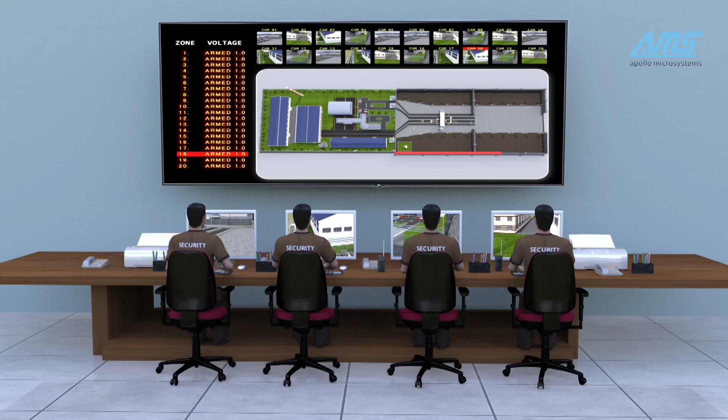Apollo Microsystems is a renowned defense systems supplier. With its design lab headquartered in Hyderabad, India, AMS is one of the first few companies to offer electronic systems for mission-critical and safety-critical applications. The state-of-the-art facility offers design, assembly, and testing as end-to-end solutions.

He's a wonderful person, a strong visionary, and a mentor. He gives us clear direction on every aspect of strategy and operation, which gives a lot of comfort to work with. We share his dream to grow this company strongly in every vertical that we work for.

I come from a middle class family. My father was a teacher and also was into farming. I chose to be an entrepreneur and started this company with a very small investment in the year 1985. When I started this journey, the size of the industry was very small. We were one among the first private companies providing services to the defense and space sector.

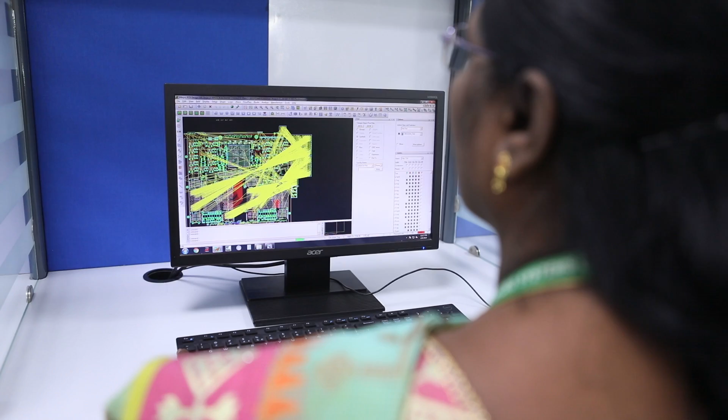Engineering design has always been my strength, and we started offering board design services to DRDO and the Department of Space. From a design services company, we transitioned into board design development, subsystem development, and system level development. I take pride to share that we have designed more than 400 technologies for defense and space sectors in this long journey of 34 years.

We have been working on an underwater weapon electronic system for the past 28 years, and now the same weapon is the first weapon being exported from India.

Keeping in view of the growing defense system requirements, we have built a complete ecosystem right from concept to manufacturing. With the last 34 years of multidisciplinary, multi-domain expertise that we had built, we now enter into the aviation market through our Canard aircraft offering.

It has been an incredible journey, and I thank all our customers, bankers, investors, suppliers, and all my colleagues for being a part of this successful journey and having bestowed faith on me and on the company.

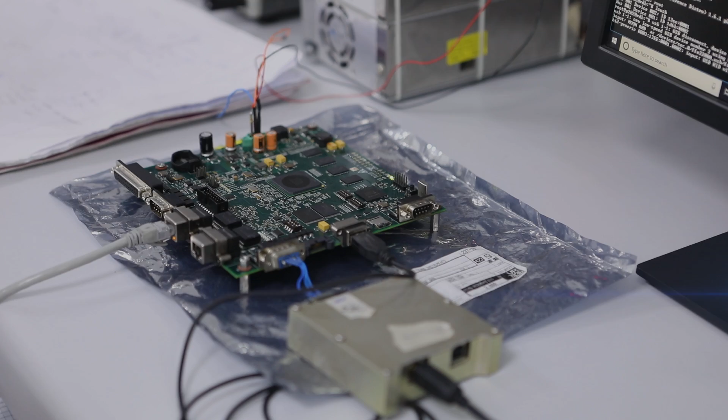We are working in a very niche market of aerospace and defense, which requires a lot of patience and perseverance. The gestation cycles of development and qualification of each system in each vertical we work for are very long, so patience and perseverance has always been part of the DNA. We are trained for it, and we always walk through with our customers and ensure that the systems are developed on time with state-of-the-art technology.

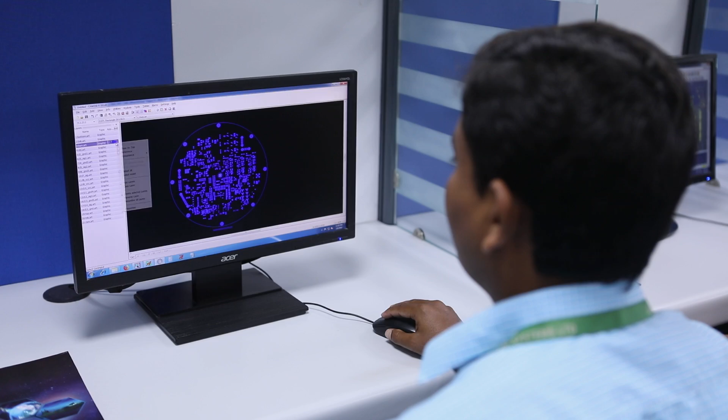AMS has a strong R&D team of 150 plus engineers with core competencies in development of embedded hardware, software, and engineering designs, including packaging of electronic hardware for various verticals. The team is well versed in the design of multi-million gate, high-speed, high-density, multi-layer, digital, analog, RF, mixed signal PCBs. They are proficient in multiple disciplines with emphasis on signal integrity and high voltage designs.

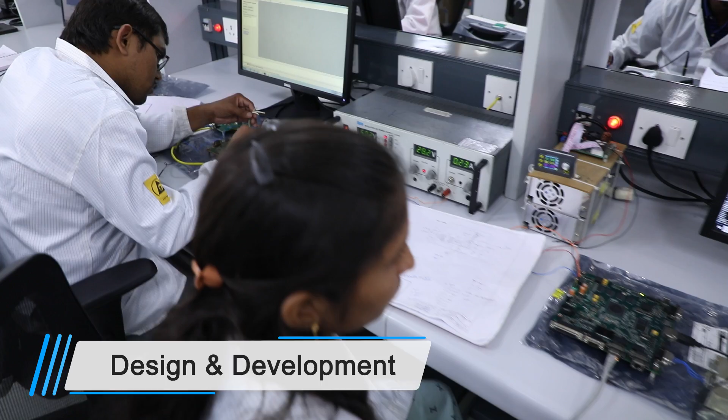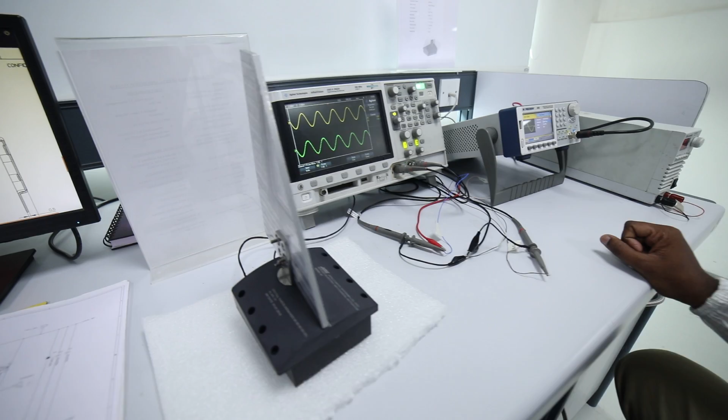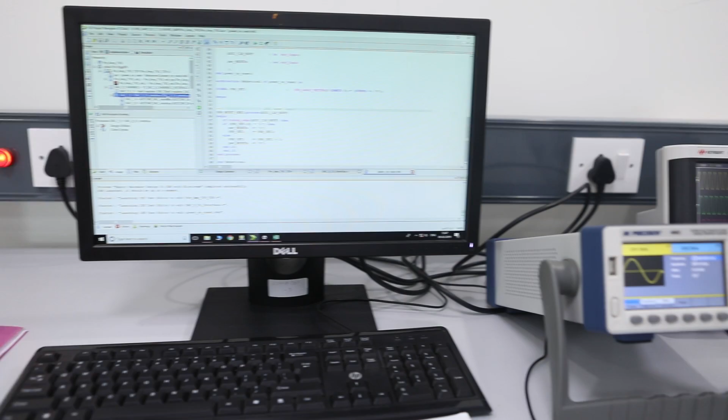The defense systems should meet harsh and extreme environmental conditions. The enclosures should be designed to meet different conditions like forced cooling and conduction cooling. AMS has an in-house engineering design team consisting of system architects and PCB design engineers. At AMS, we design and develop high-performance, custom-built ruggedized electronics and electromechanical systems to withstand extreme environmental conditions in space, naval systems, avionics, missile defense, ground defense, and homeland security.

AMS in-house stores has all the necessary materials stocked that are needed for design and assembly. The stores are maintained with all safety standards. Every material component on receipt is binned in stores only after inward inspection, and data is maintained using ERP. The entire documentation is well maintained for traceability as per AS 9100 standards.

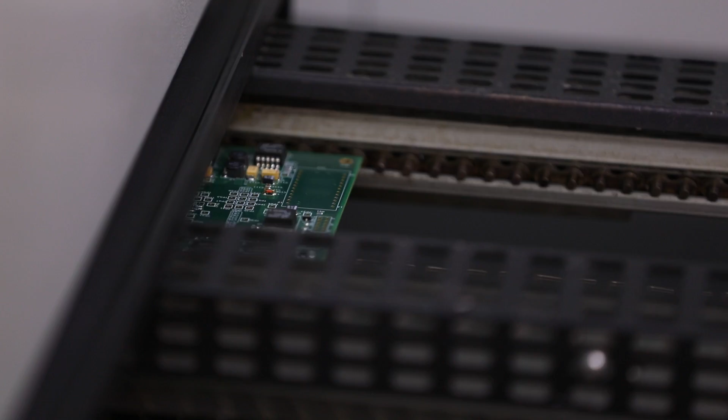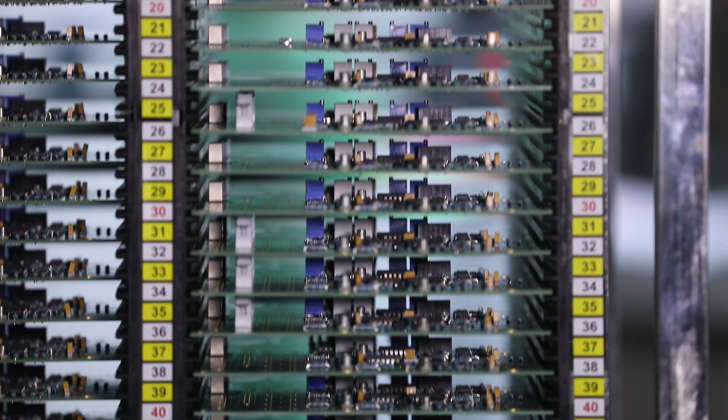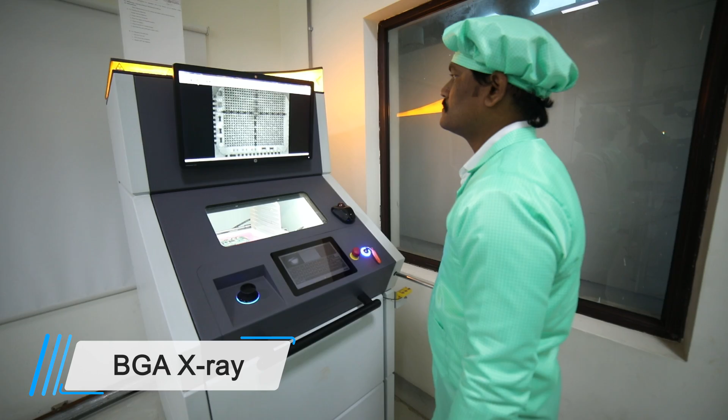Engineers at the SMT line configure printed circuit boards with automated processes. Automatic optical inspection ensures the highest quality of the PCBs. Inspection of populated PCBs is carried out by IPC certified engineers using 150x magnifiers, AOI and BGA X-ray. If there is scope to improve the quality further, they are sent for rework.

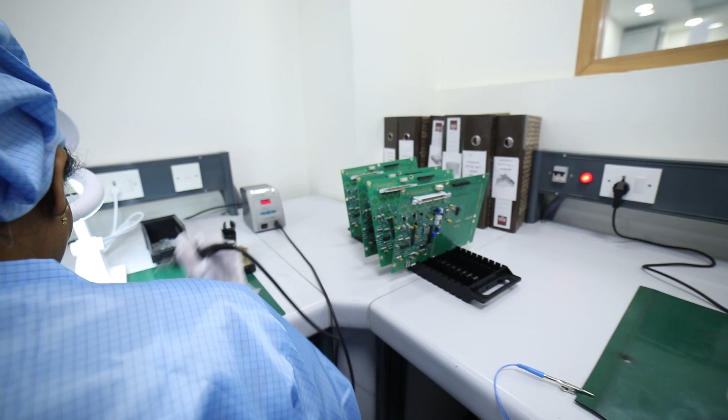A wash cycle is required to clean the PCBs to remove debris, followed by conformal coating.

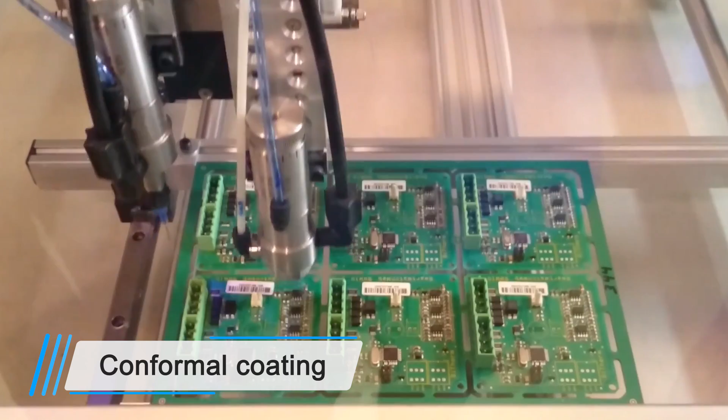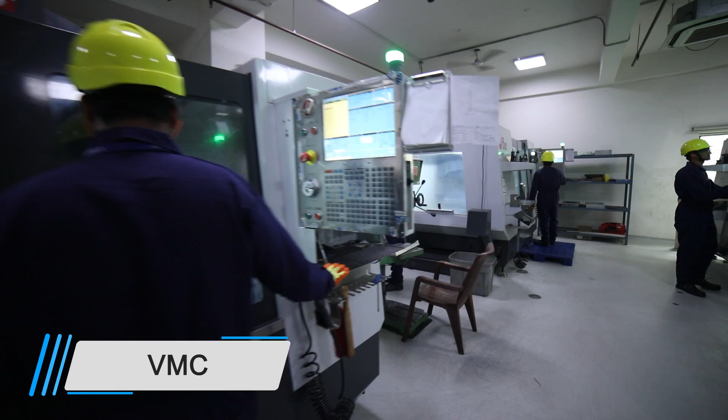Our machine shop is equipped with CNC vertical milling machines and can handle jobs up to 6 microns accuracy. Our wire electrical discharge machining can handle jobs up to 2 microns accuracy with sharp edge finish and excellent surface finish.

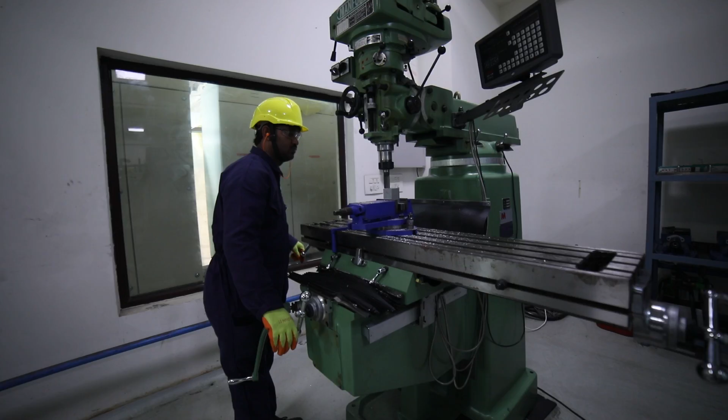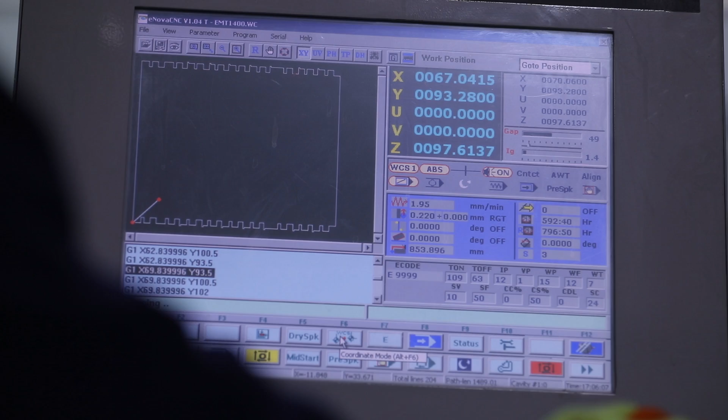We have an in-house tool room facility. The machine shop is the beating heart of our mechanical division.

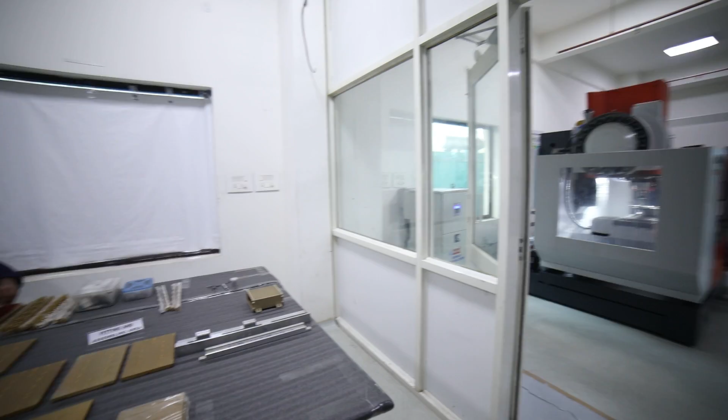Unit assembly and harnessing is done by IPC trained technicians to meet IPC standards. Our team has exposure in harnessing for ground equipment, missile systems, shipborne systems and many more.

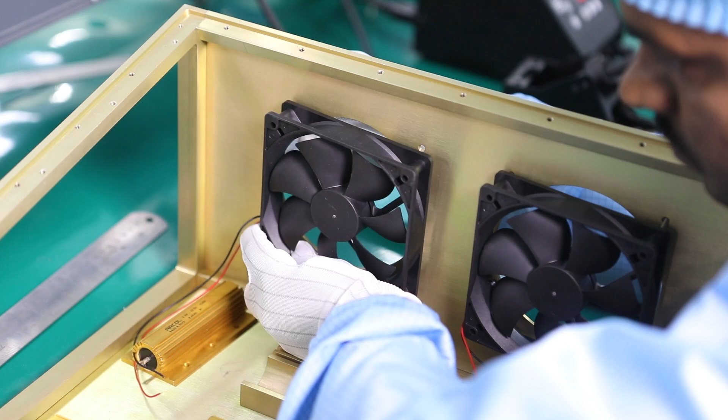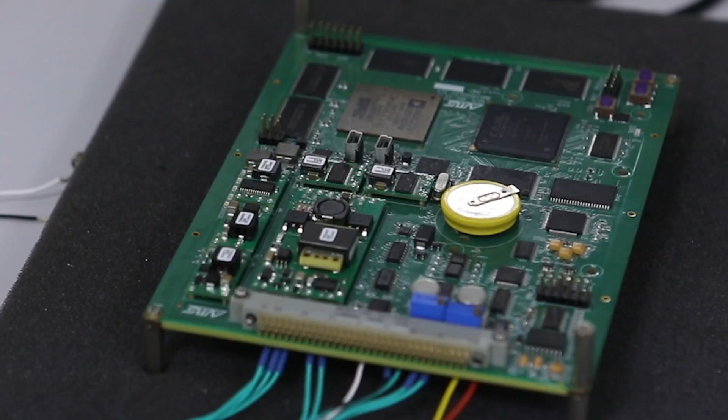In-circuit testing looks at the functioning of individual components after they are soldered in place. Functional testing provides a final go or no-go decision on finished PCBs.

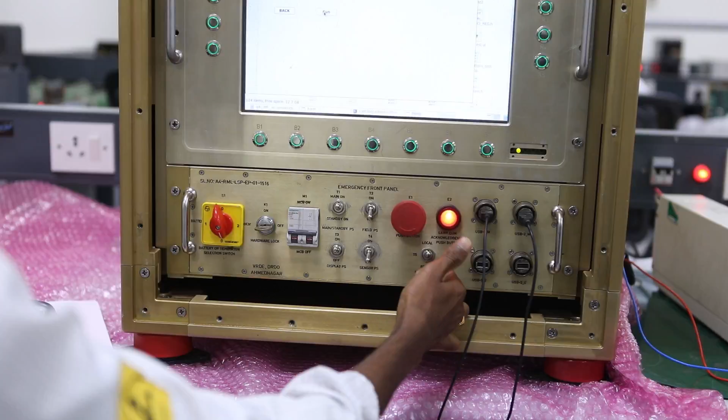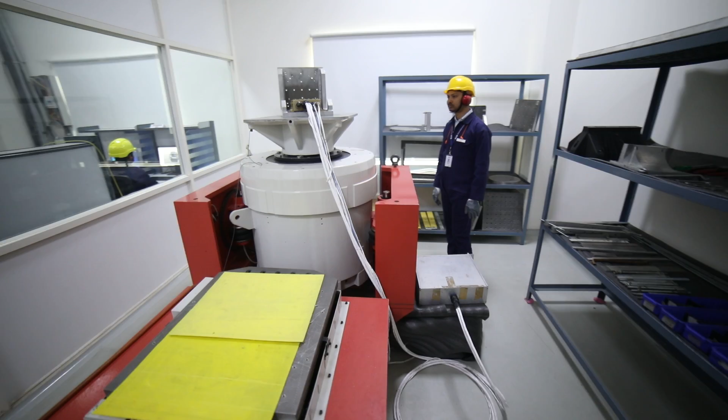Our ESS facility is equipped with vibration shaker and temperature cycling chambers. Vibration facility team designs its own jigs and fixtures to carry out vibration of equipment which are of varied sizes.

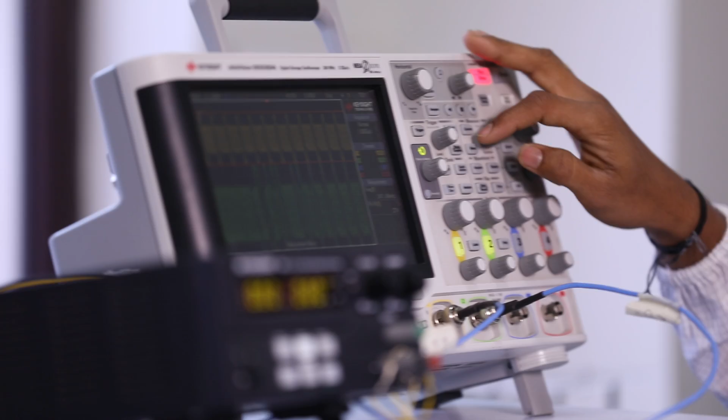A detailed review is carried out on each project at periodic intervals involving all stakeholders like system architects, team leaders, quality control and production teams. Gap analysis is done in presence of the management team.

Apollo Microsystems has a solid marketing and sales function.

AMS is an employee-friendly company. AMS has 33% of workforce as women.

AMS practices a transparent culture that creates openness between management and employees. AMS helps its employees achieve and maintain healthy work and life balance by organizing various training sessions related to work and personal development.

AMS believes that companies are built on people and not just products.

Finance function at AMS is led by financial experts. AMS posted consistent revenues and profits in the last year.

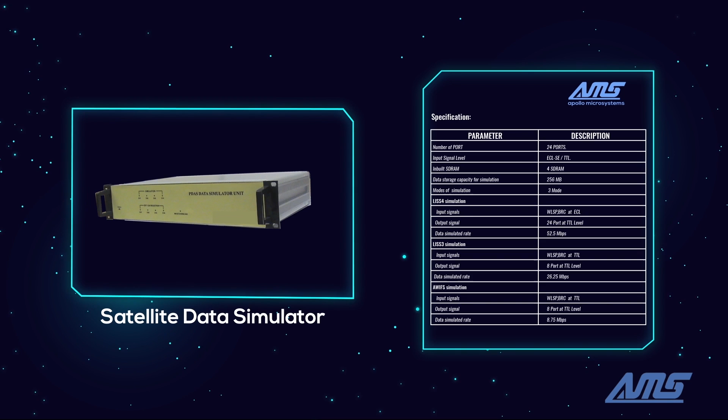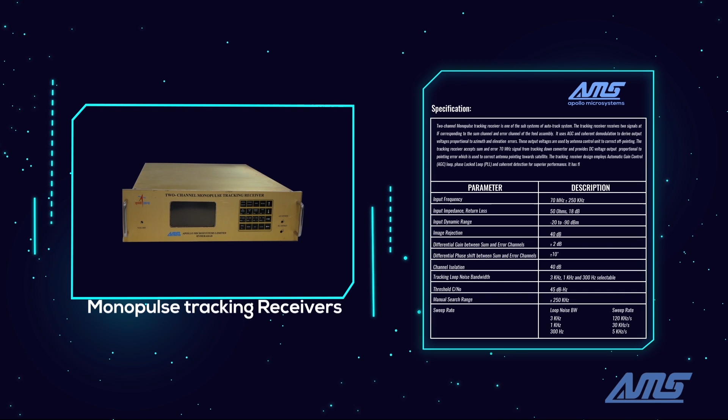Products and their applications: integrated payload checkout system, satellite data simulator, high-speed frame synchronizer, time code reader generator, bit synchronizer, monopulse tracking receivers, high-speed data recorder and data handling system.

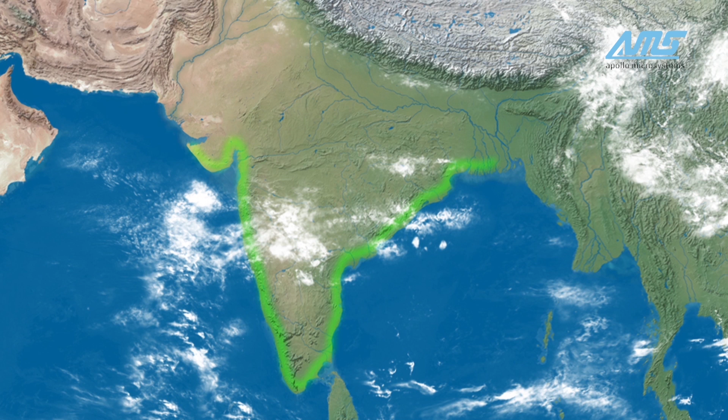India has a long coastal line of 7,517 kilometers, which is vulnerable to threats from enemy countries, pirates and natural calamities. Indian Navy plays a vital role in defending all the threats and keeping the nation safe around the clock.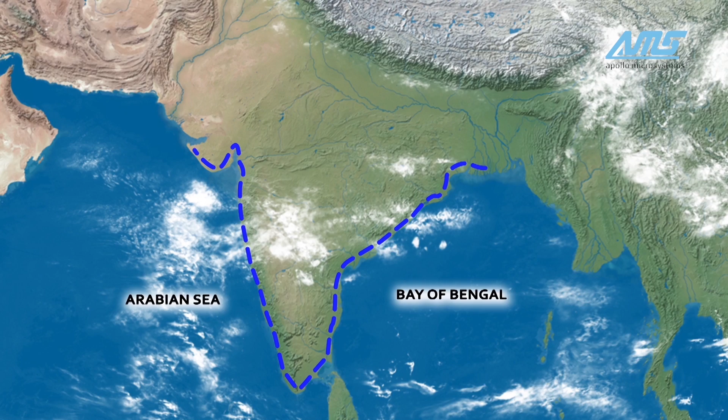The naval infrastructure is equipped with fighter frigates, smaller ships, remote unmanned operating vehicles, submarines which carry underwater weapons, and electronic warfare systems. TAL, Advanced Light Torpedo.

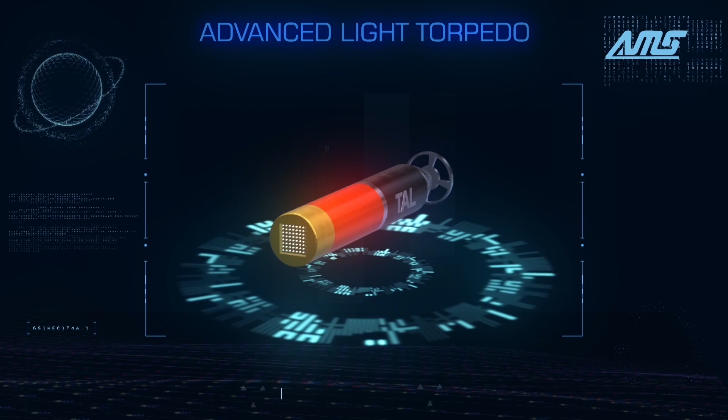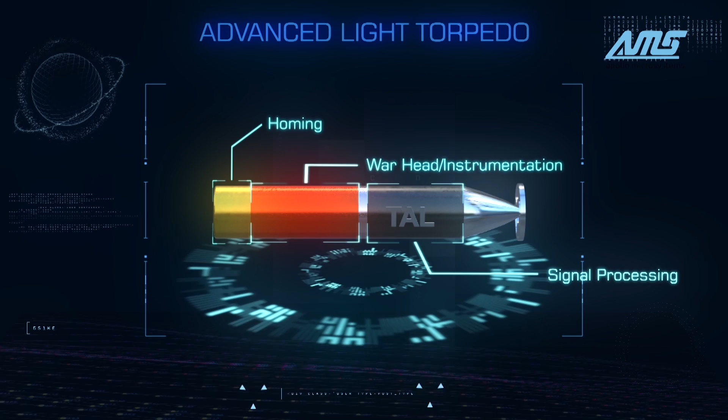AMS is working in TAL torpedo weapon electronics for the past 28 years and has contributed in its life cycle development, management and support. This is the first weapon being exported by India, and AMS has key contribution in this weapon system electronics.

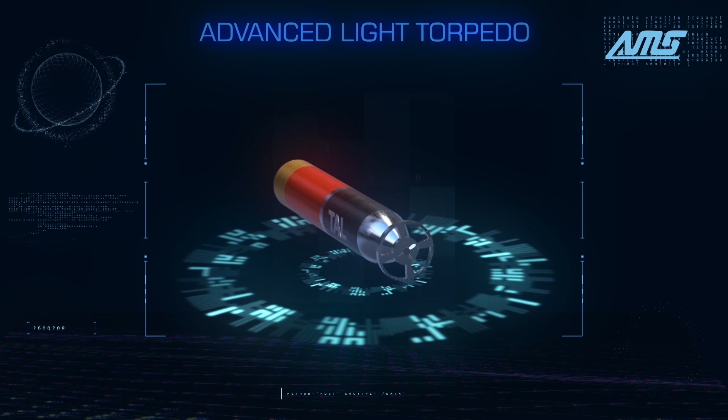We are the only private industry who has developed homing systems for torpedoes in India. The entire weapon electronics in TAL are supplied by our company, making us a unique supplier.

SSBN - First Indigenous Nuclear Submarine Program. AMS proudly presents its contribution in India's first indigenous nuclear submarine program. The power supply chain and monitoring systems are fully qualified and have demonstrated their reliability for past several years.

This is a testimony of our diversified technical capabilities. Ship: AMS supplied sonar systems, turret control systems and marine consoles for ship-borne applications.

Enemy submarine detection - Varunastra. AMS has been part of several torpedo programs, and in the Varunastra program, our signal processing systems are qualified and added immense value for the weapon.

Marich is an expendable decoy and is the first indigenously developed decoy in India. AMS has a key contribution in the programs under the guidance of DRDO.

The state-of-the-art algorithms and signal processing hardware are developed by AMS. The decoy has undergone successful trials and is accepted for induction by Indian Navy. Upon detection of enemy torpedo, the command control team programs the firing of the decoy to deceive the enemy torpedo.

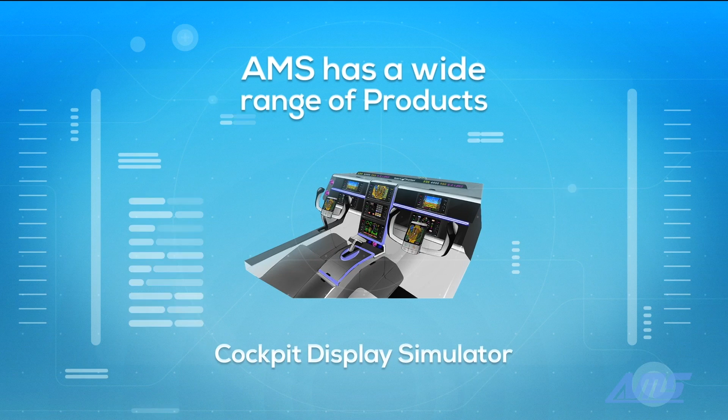AMS has a wide range of products: gimbal payload electronics, generic PCM encoder and decoder, DC UPS unit, quad actuator controller, radio altimeter, cockpit display simulator, advanced fire control system, fin actuation control systems. Our expertise in defense avionics is poised to take off into the aviation market.

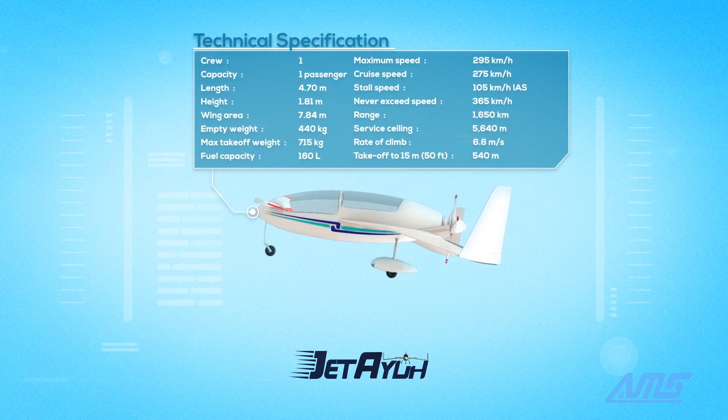Any nation's integrity is protected by armed forces. Especially military plays a vital role in combat situations to protect the country against land-based attacks. They are fighting for tomorrow by giving up their today.

AMS has built specialized expertise in development and manufacturing of rugged electronics used for military applications. Ground-based military electronics requires meeting harsh environmental conditions. Our systems comply with MIL STD 810F requirements.

Our engineering expertise, coupled with our strong hardware design knowledge, makes us a unique solution provider delivering a reliable product, covering vibration, shock, humidity, high temperature, low temperature, and EMI/EMC.

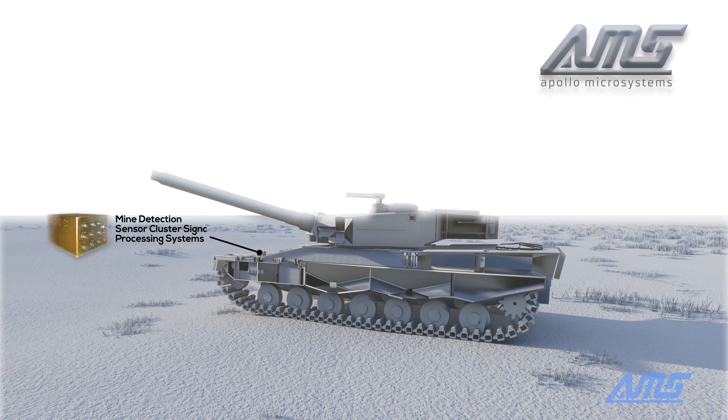AMS products include: mine detection sensor cluster signal processing systems, transmission control, throttle control, intelligent vehicle data monitoring, stabilized turret control systems, instrumentation cluster, navigation systems, tactical data link modem and antenna navigation systems, electric and hydraulic servo drive system, mil-grade DC power supplies, electronic suspension system, motion control system, climate control system.

Missile defense systems are meant to protect nations from incoming missiles and act as a missile shield for the country, specifically for strategic locations.

AMS has been working on Indian missile programs for more than 3 decades and brings in technical and domain expertise, and has been a key contributor to the success of many of the programs. We stand among the first few private companies contributing to indigenous missile programs, and systems developed have been successful in trials and have entered production phase.

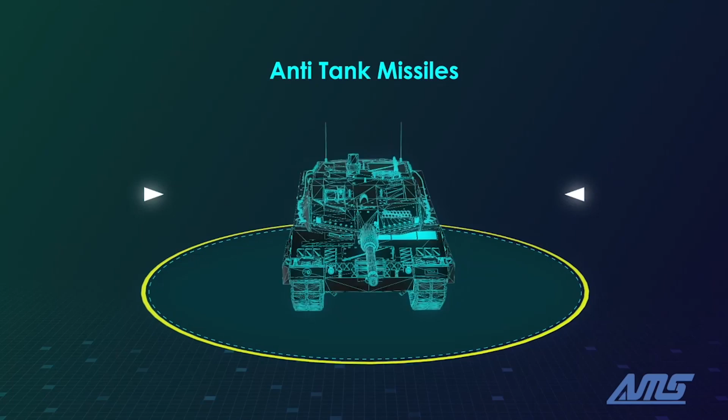We offer on-board weapon electronics and ground support equipment for missile defense systems. Technologies developed by our company are part of the success story of surface-to-surface, surface-to-air, intercontinental ballistic missiles, anti-tank missiles, air-to-surface, submarine launch missiles, and air defense missiles with capabilities of reaching the exosphere.

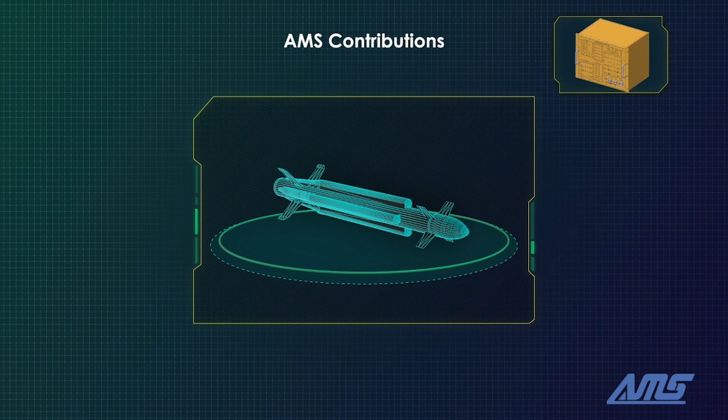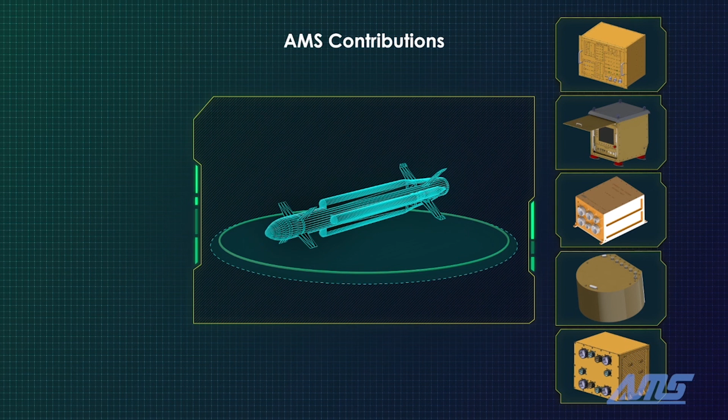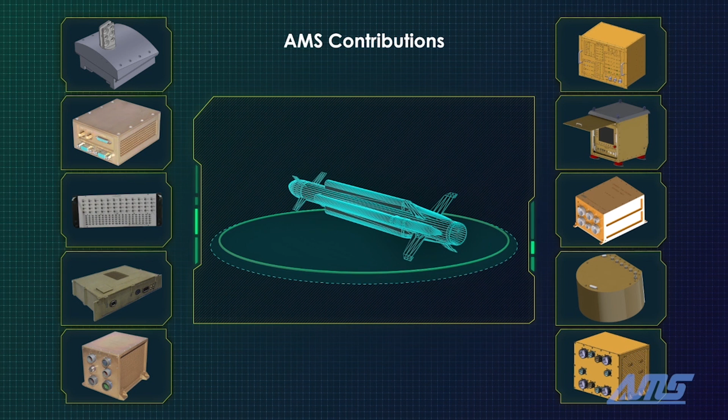AMS contributions include: missile hardware simulators, launcher controllers, PCM encoders, digital signal processing systems, FPGA-based quad-channel controller, electromechanical actuators, signal processing units, launch interface units (LIU), INS inertial navigation systems, IAM integrated avionics modules, MIU missile interface units, PSSU power supply switching units, and checkout systems.

Systems developed and manufactured by us undergo stringent quality processes laid down specific to the application and comply with MIL STD 461F and MIL STD 810D.

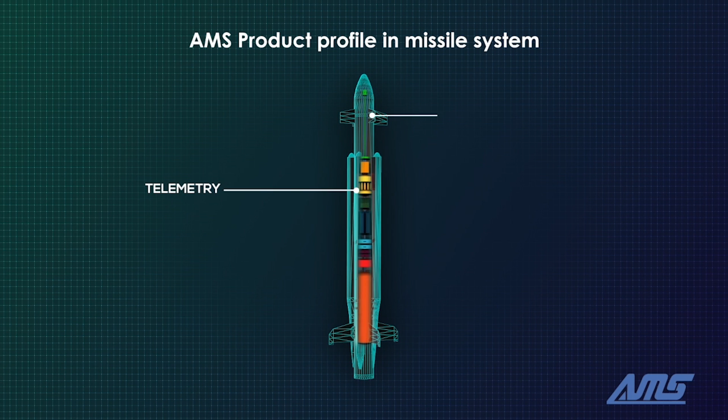AMS Products Profile in Missile System: Telemetry, RF Receiver Antenna, Radio Proximity Fuse, Target Update Receiver, Servo Control Unit, Command Guidance Unit, Sensor Package Unit, Onboard Computer, and Missile Interface Unit.

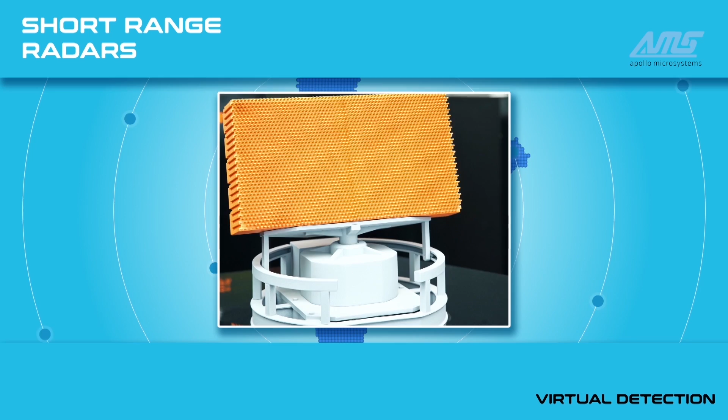Short-range radars detect obstacles and possible impacts. AMS has solutions for secured vehicle, pedestrian and sliding gates with integrated gate arrays.

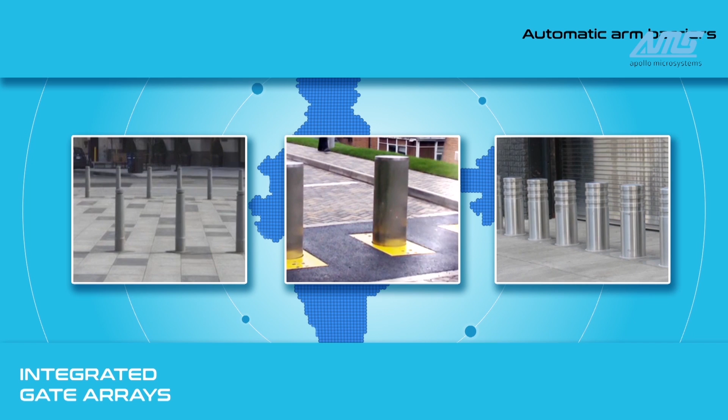Drones are used for surveillance, but when they fly into restricted territories, they can be a threat. AMS anti-drone solutions can be used to detect an unlimited number of drones at any point of time. Perimeters are protected using smart fence perimeter systems and remote site protection, using CCTVs and alarm panels.

These solutions can be used at prisons, correctional facilities, countries' borders, BTS stations and telecommunication sites, residential properties, warehouses, data centers, industrial parks, and military and naval bases.

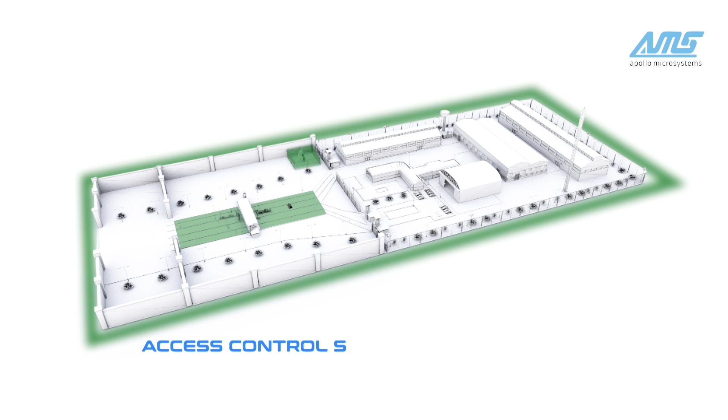AMS has smart fencing solutions. A fence is activated with surveillance systems to resolve threats up to 70%. Gate entry security systems are activated to resolve 85% of threats. Access control security systems can be activated to solve 95% of threats. Anti-UAV defense systems can be activated for 100% threat resolution.

Smart fencing solutions from AMS help with intruder detection and immediate action to arrest any such activities. Thermal imaging and electro-optical surveillance systems do not allow intruders.

Gate access control systems ensure entry only to authorized vehicles. Any unauthorized vehicle movement is stopped.